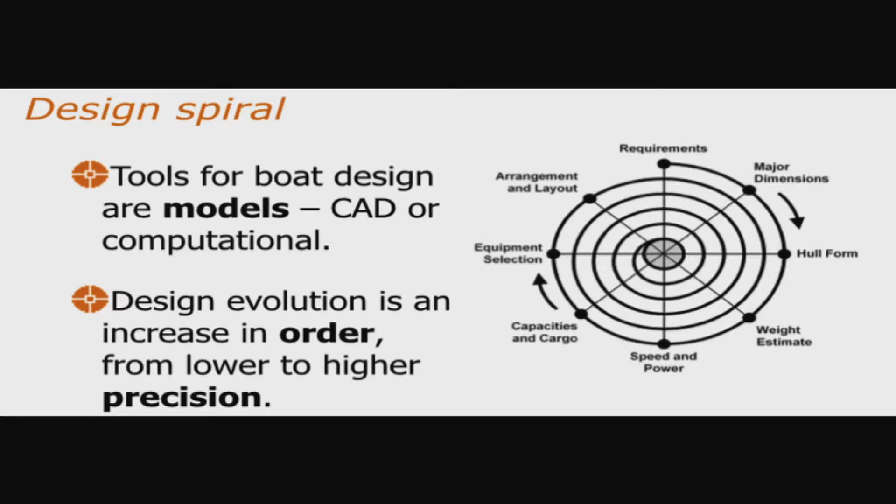As naval architects and engineers, the design spiral drives us. So when we talk about tools, sometimes we talk about CAD tools or computational tools. And the design spiral gives us some advice as to which tools we want to use, from higher precision or lower precision, depending on the maturity of the product. I'd like you to consider this. 50% of a product's life cycle costs are determined by the results of the project's first 5%.

When is the really important work done? My contention and what I would like to share with you is that early stage design is incredibly important. By the time of the first design review, performance, cost, and schedule will have been determined to the first order, because the critical assumptions and choices will have been made. The really serious mistakes occur on the first day. They lock you into things that are going to stay with you the entire design.

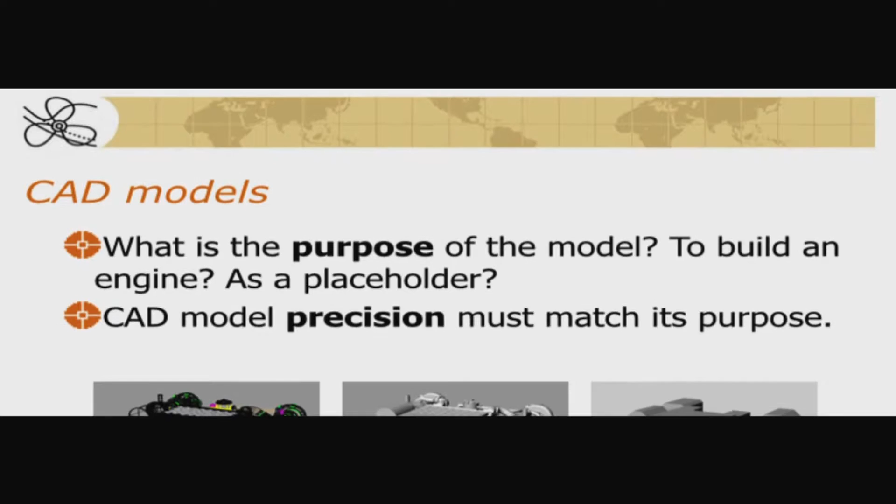Now, successful model selection, we have to look at the proper models we're going to use, whether they're CAD models or computational models or physical models. We need to find models that hit that sweet spot, I call it, between facility and function, or precision. Now, CAD models, what's the purpose of the model? Is it to build an engine? This is a CAD model with over 64,000 individual surfaces. As we go to a lower order or less precise tool, we actually may have models that are far better for the purposes at hand, and this is a great illustration of that.

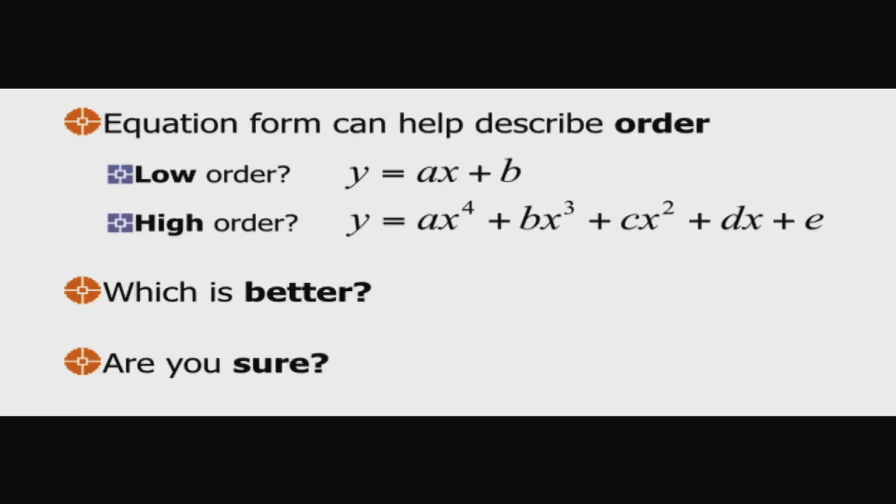Now, I live for computational models. My work is all about numbers and equations. Low order, simple line, high order, a polynomial. Which is better? Who likes high precision? Who likes low precision? Oh, you're all so cowardly. Pick one. Are you sure? You can only be sure when it's put into the context of the project.

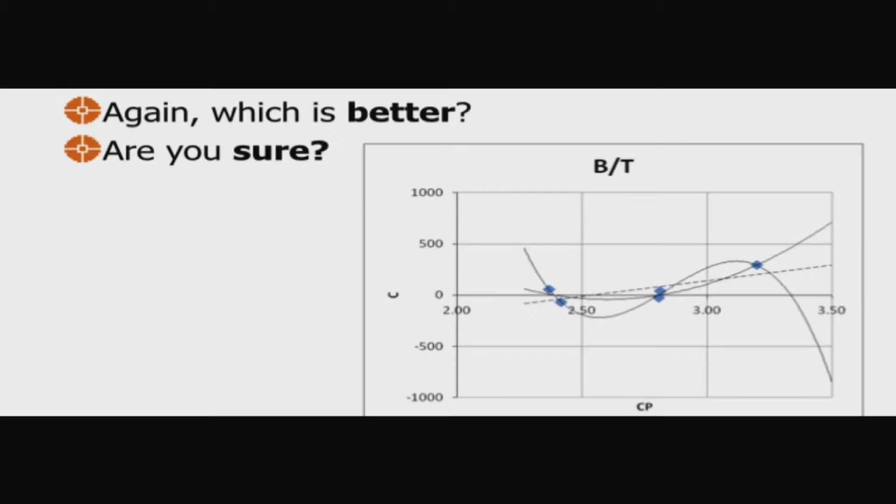Again, which is better? We have some simple points with different orders of tools or models. We have a simple line, we have a quadratic, and we have a cubic polynomial. We really don't know which is better until we understand the nature of things.

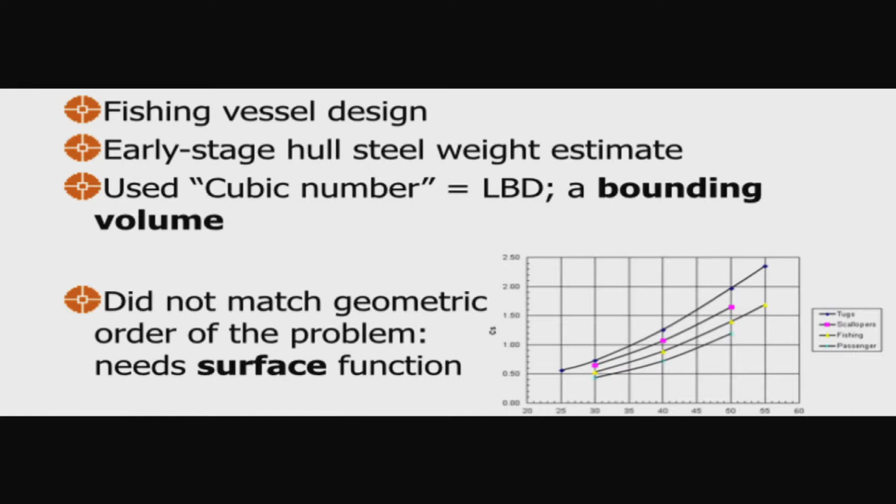Now, early in my career, I had a project doing weight estimating for fishing vessels, and they used a bounding volume called the cubic number. Now, that wasn't a very good model for weights because weights are a surface function. And so we actually needed a slightly higher order, the surface of that volume. Later on, I had a boss who insisted on doing material pickoffs for weights, even in the earliest stages of design. This was where too much order was a problem, because we didn't even have the geometry of the vessel established at that point.

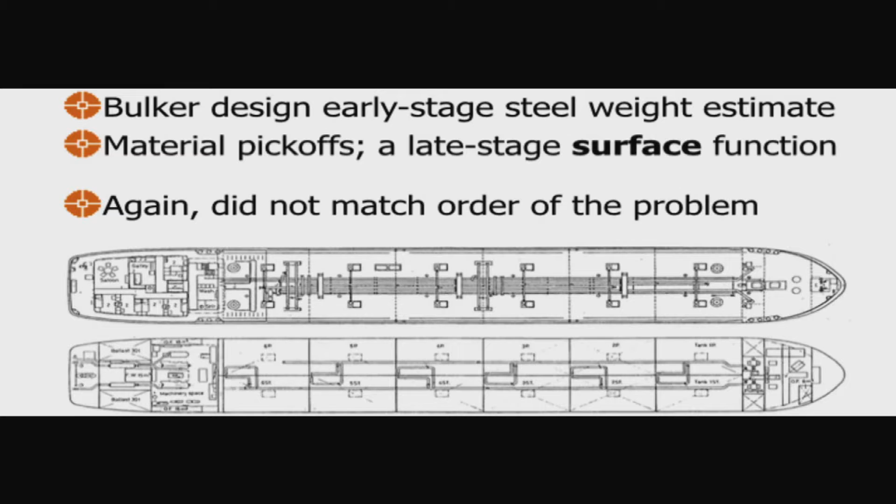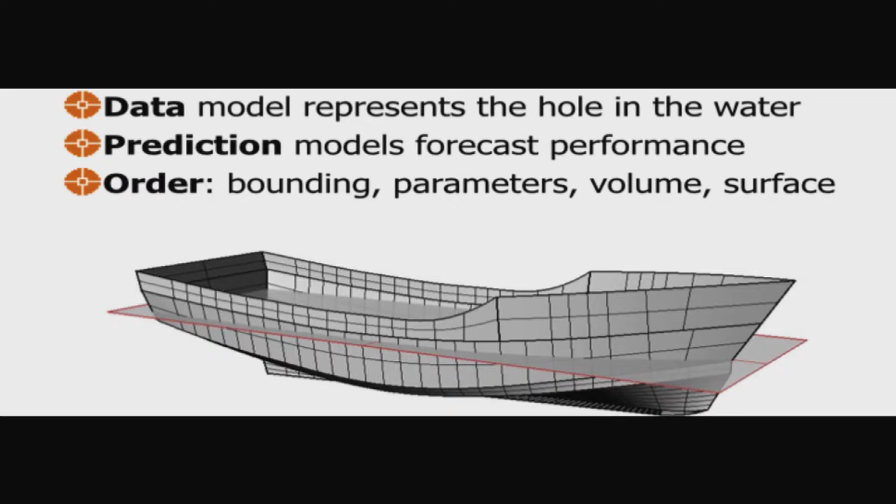Hydrodynamic computational models. This is the world in which I live. The data model represents the hole in the water. The prediction models forecast performance, whether that's for hulls or propulsors. The order, I'll use bounding, parameters, volume, surface. And we'll see illustrations of that here in just a moment. Now, a bounding computational model is very, very simple. What is reasonable precision, however?

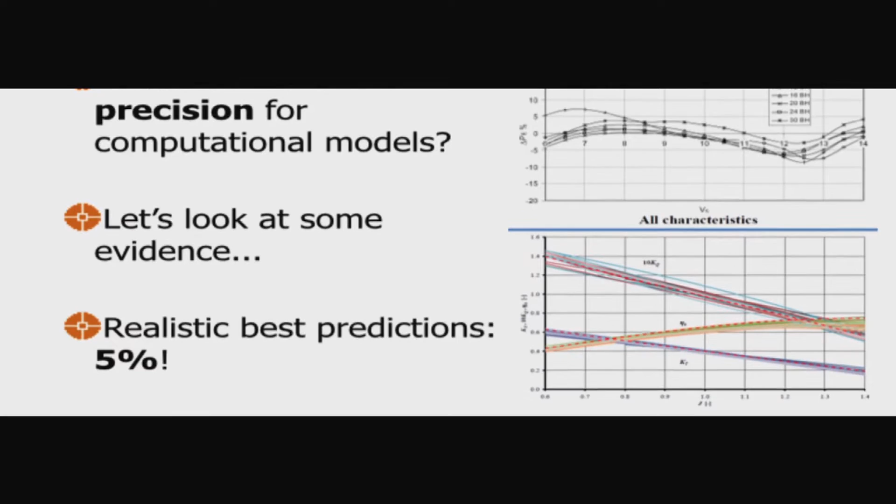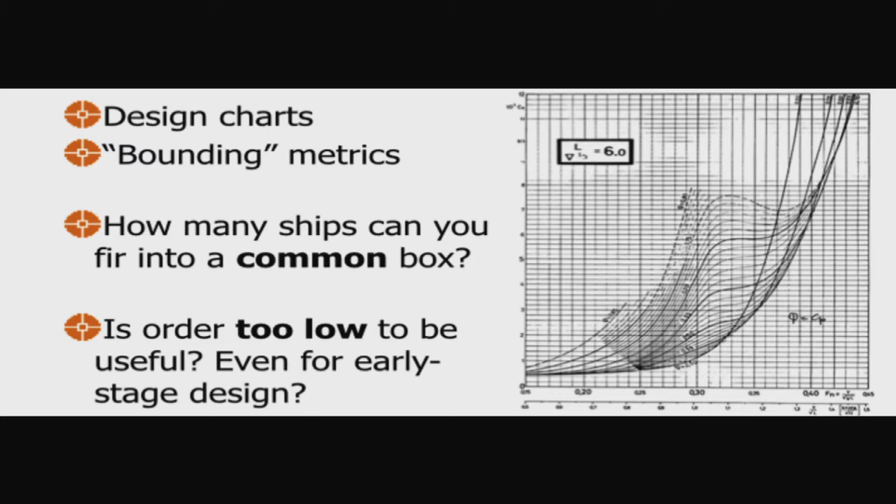These are two physical examples. This is model tests against full-scale resistance, and these are the best of the computational flow codes for propellers. There's such scatter in the data that anything better than 5% is an optimistic outcome. Now, the earliest resistance predictions are simple charts. We may recognize this as the Harvald chart. But how many ships can we fit into a common bounding box? Virtually an infinite number. This may be too low of an order for any meaningful work.

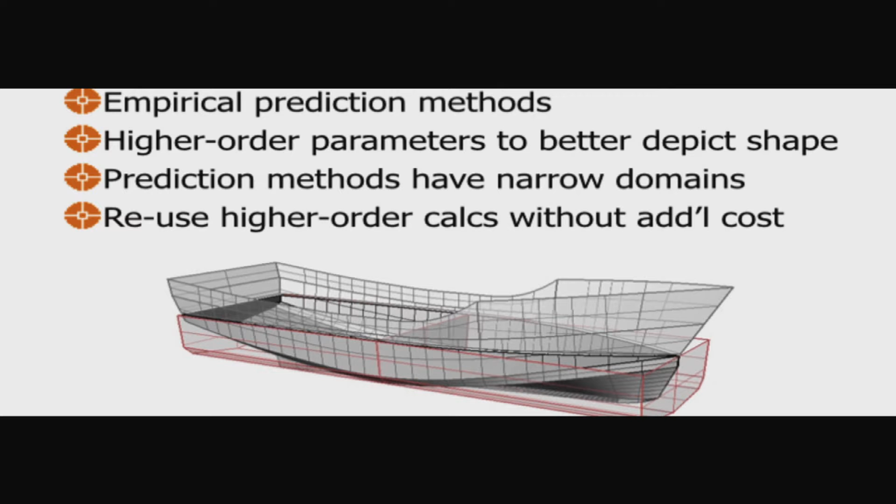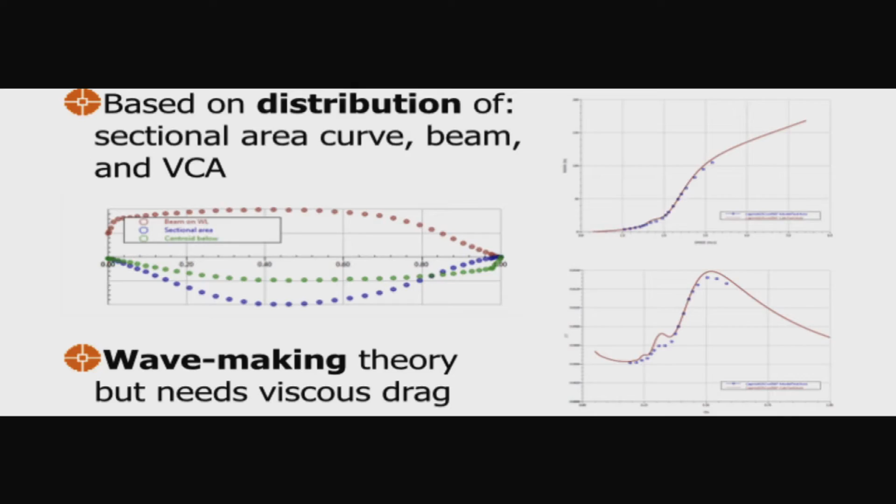If we take that bounding box and refine it a little bit into parameters, we can define the shape. We have to narrow the scope of the tool, however, because now we don't have a single tool that's useful for all things. We have tanker tools, we have fishing vessel tools, we have planing hull tools. Now, as we go into a higher order, we'll take this distribution and we'll identify its submerged volume. And we can use wave-making theory as an example of this to get very, very good predictions with a limited amount of data. This is kind of that middle order.

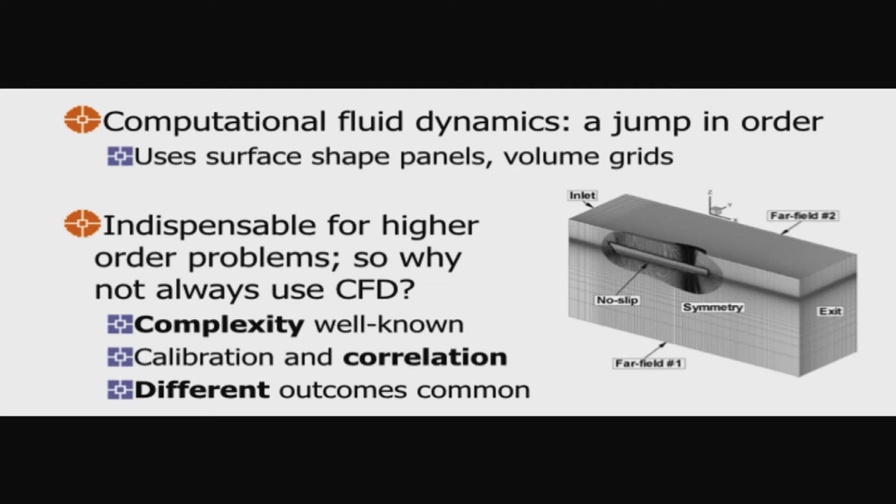Now, when we want to go to the highest order, we have problems that we can only use high-order tools. CFD is the perfect example of that, where we use the surface panels that describe the geometry. So why don't we always use the highest order tools? Well, they tend to be complex, they require calibration and correlation with empirical data sometimes, but the biggest problem is that we often get different outcomes. You take the same tool and give it to different people, and you get different answers.